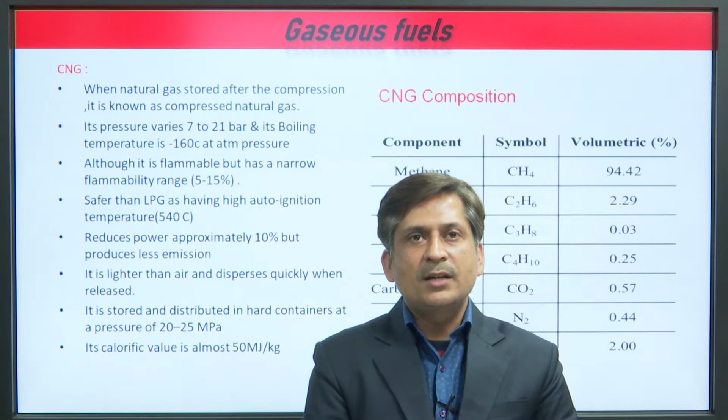In the last lecture we discussed LPG. Now CNG, known as compressed natural gas, abbreviated as CNG, its pressure varies from 7 to 21 bar, boiling temperature is very low at -160. The flammable range is 5 to 15%. It is safer than LPG as it has a high auto ignition temperature of 540 degree Celsius.

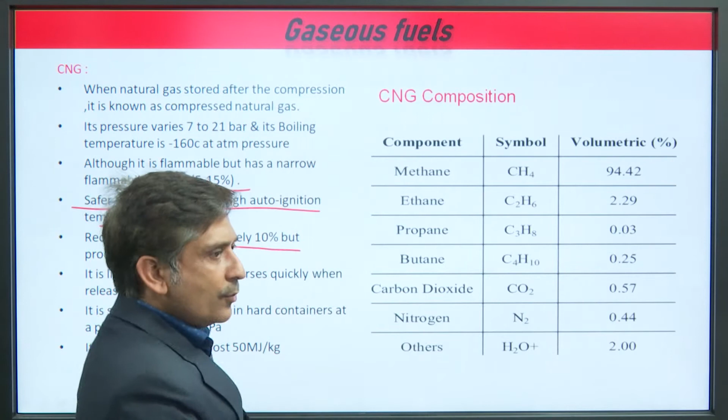But it reduces power if used as a replacement for the engine, about 10% power loss. It is lighter than air and disperses more quickly, which makes it safer for utilization. It is stored at 20 to 25 megapascal and has a calorific value of 50 megajoule per kg.

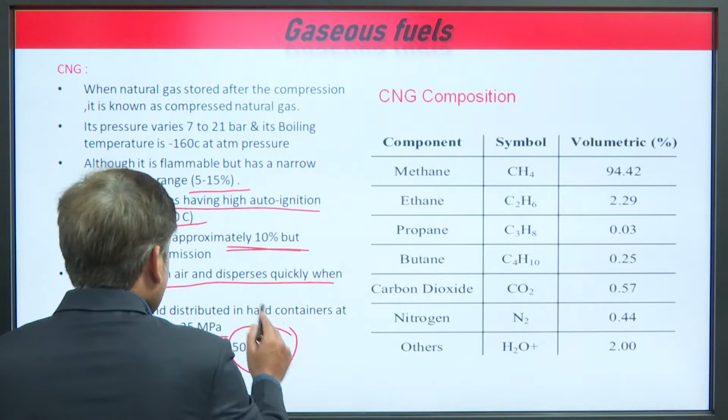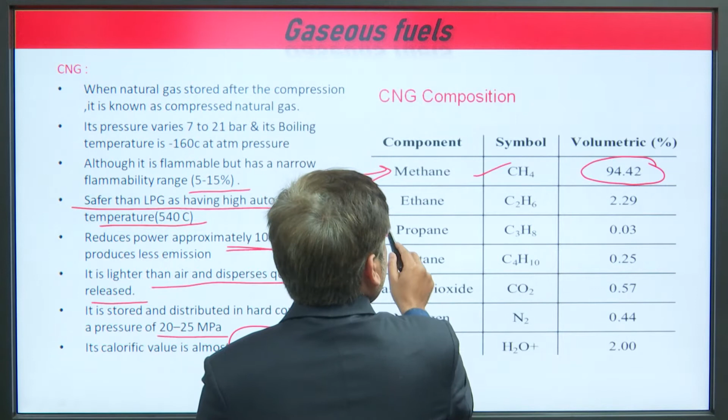This is the composition having the maximum amount of methane, about 95%, and the remaining is ethane, propane, butane, carbon dioxide, nitrogen and others, but the main composition is methane.

Now come to another gaseous fuel, hydrogen, the simplest and most abundant element on earth. It has very high energy and burns with almost no pollution, because if H2 burns with air it gives H2O. But since air contains nitrogen, it also produces NOx emissions.

This problem is there, along with its high cost, storage cost, and safety issues. The lower calorific value of hydrogen is about 120, and it can be stored physically as gas or liquid. It has electrochemical properties used in fuel cells, and a high auto ignition temperature just like CNG. Most importantly, responsible for its safety, it has a broad flammability range from 4 to 74%.

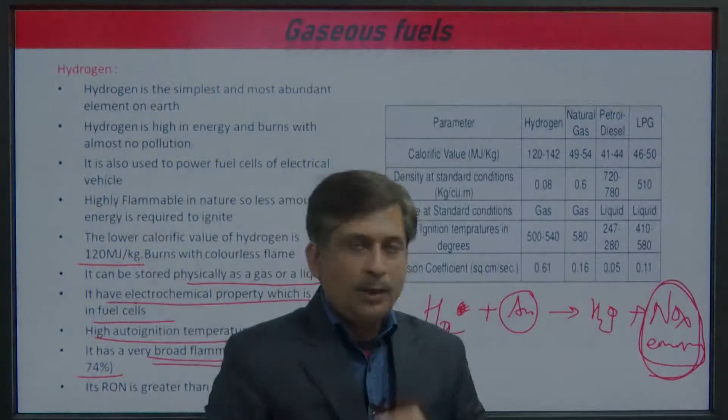So it is very wide. If it leaks somewhere in a given space and there is a heating source, you cannot feel it, and it can catch fire. Its research octane number is about more than 130.

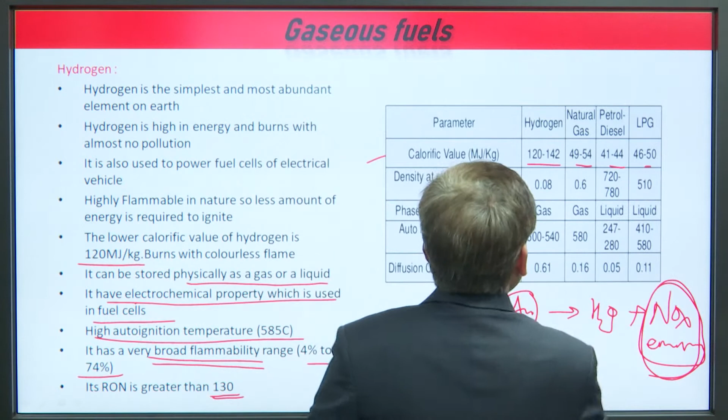These are the comparable properties of hydrogen, its calorific value as compared to CNG, petrol, and diesel. Its density is very low compared to petrol and LPG, and its phase standard is gas. Auto ignition temperature for petrol is between 250 to 280, and for LPG it is very high, but here it is 500 to 540, and it diffuses very fast.

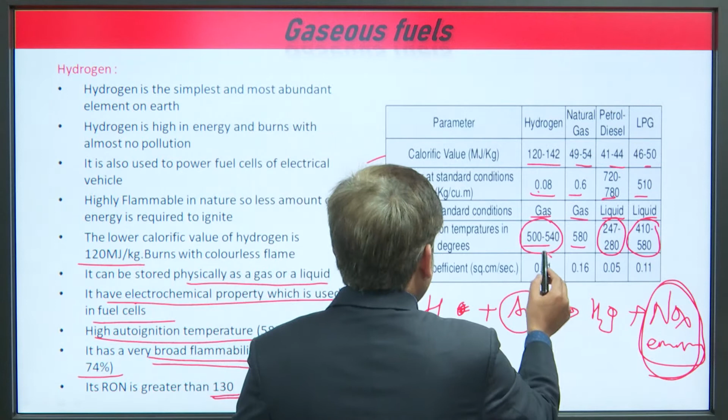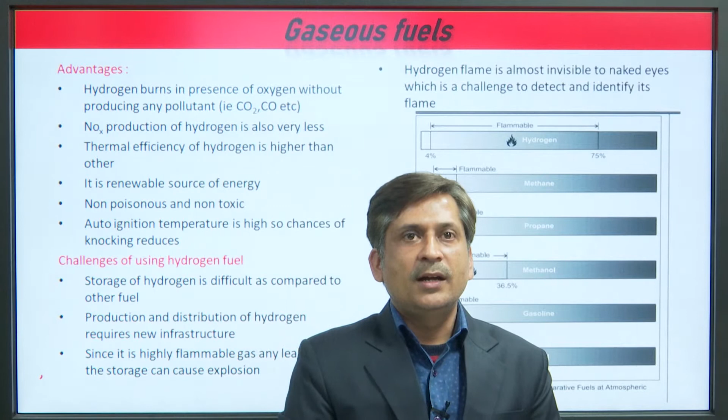Diffusion coefficient, meaning it leaks very fast, and its high flammability range are responsible for its safety concerns, because it can catch fire easily, it is not so easy to handle. These are the advantages of hydrogen: non-poisonous and non-toxic. We have also discussed the challenges of using it.

These are hydrogen's comparative flammability ranges with other fuels. You can see hydrogen is the highest at 4 to 75%. Then for methane, which is the main component of CNG, it is 5.3 to 15%.

Propane has a flammability range of approximately 2 to 10%, and methanol, which is a good SI engine fuel, has this flammability range too. Gasoline, or petrol, has a flammability range from 1 to 7.6%. Diesel has the least among these, 0.6 to 5.5%.

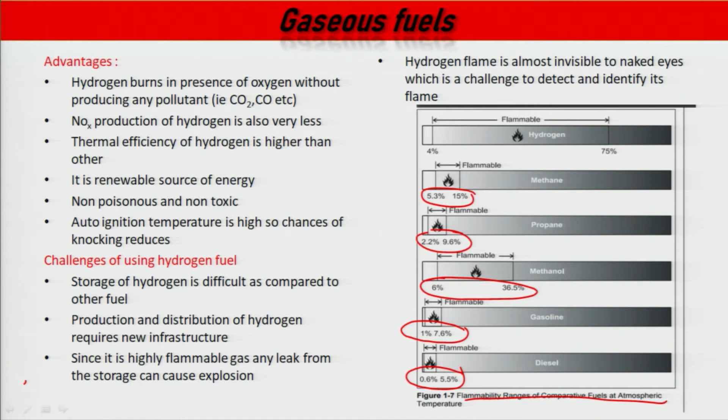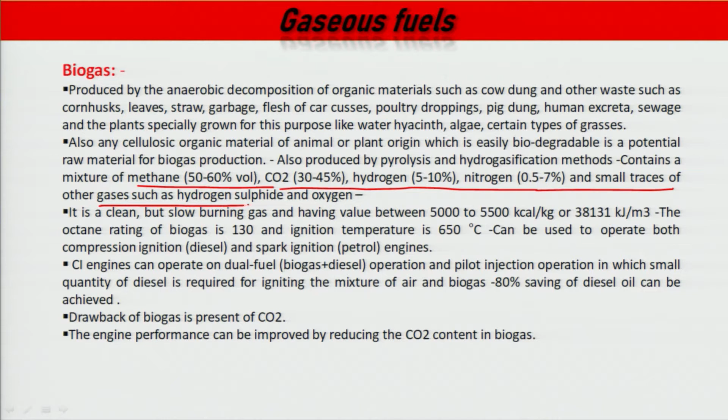Then biogas, which is also called bio CNG type thing, has methane composition of 50 to 60%, CO2, hydrogen, nitrogen, and small traces of other gases. It is a clean and slow burning gas with a calorific value around 5000 kilocalorie.

The octane rating of biogas is close to CNG because it also contains methane. We can also go for enriched biogas, where we purify this biogas and enrich the methane composition, then it is known as bio CNG.

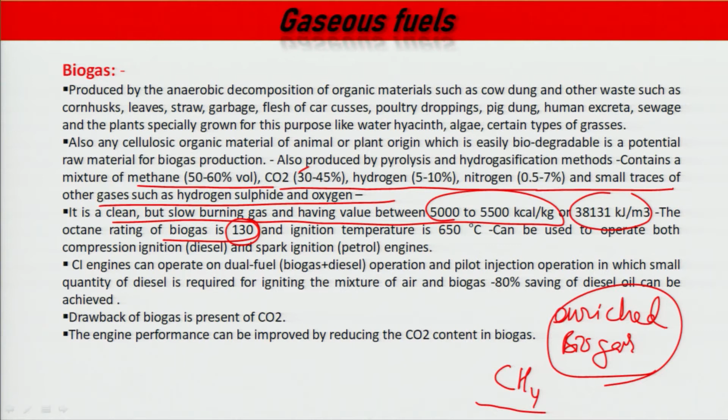The drawback of biogas is the presence of carbon dioxide. The engine performance can be improved by reducing this carbon dioxide percentage in the biogas.

Now come to alternative fuels for diesel and SI engines. Biodiesel is one of them, which we introduced in the last lecture. Biodiesel can be used in some percentage; it is methyl or ethyl ester of fatty acids produced from vegetable sources, edible or non-edible types.

It has better lubricating properties, much higher cetane rating, and very low or near zero sulfur as compared to diesel. So it can be used in experimental work.

We have done many things. Biodiesel is used from up to 20%, which is recommended, but we can also go beyond it. Up to 20%, it has been reported that it gives better air-fuel mixture if blended into diesel. It has lower calorific value. Cold flow property is a big problem because at lower temperature, the components in the biodiesel freeze. So cold flow property is a big challenge.

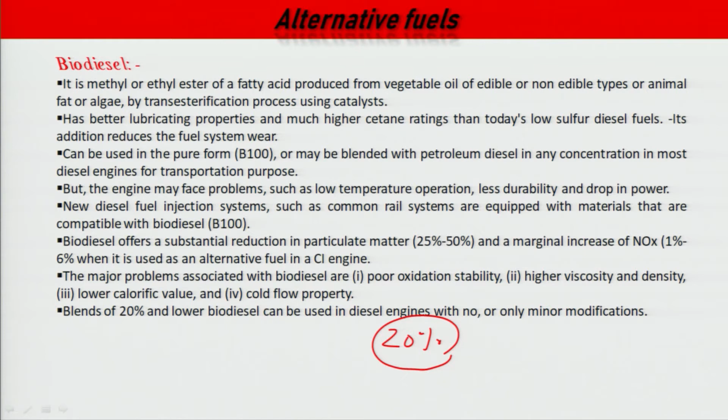So we can go for different methods. In the coming slide we will discuss, because these are the properties, advantages and disadvantages of the CI engine.

The advantages of the CI engine compared to the SI engine are lower CO, lower hydrocarbon, and lower carbon dioxide emissions. But the disadvantage of the diesel engine is higher NOx and a high level of smoke and particulate matter, PM. These are suspended particles, which may be PM10 or PM2.5 based on the size of the particle in microns.

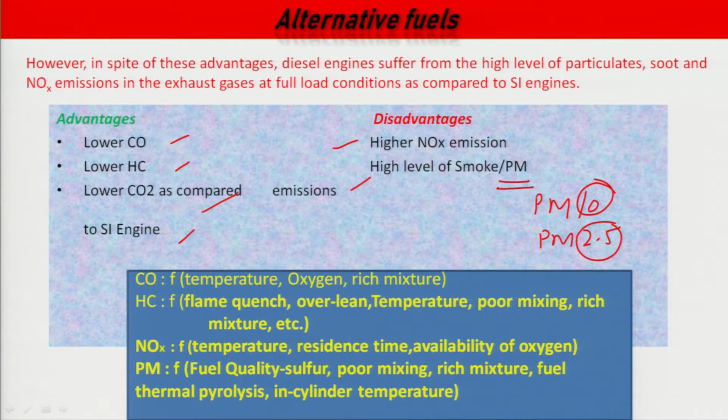So biodiesel can be a good solvent for the diesel fuel in the diesel engine.

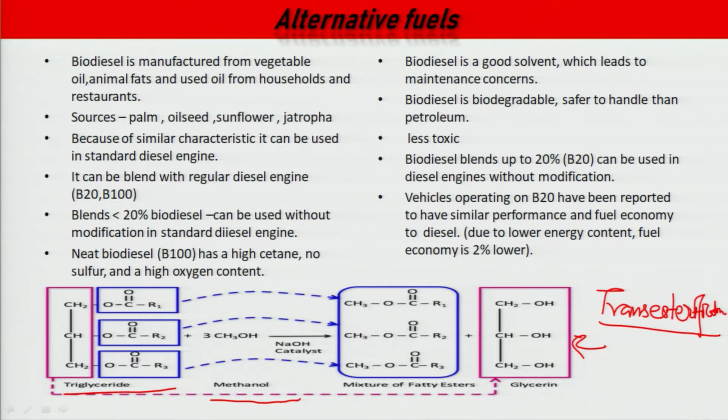This is some study I am showing because we can use different types of seeds, either non-edible or edible. We will not go into detail, just like mahua, sahjan, jatropha, karanja, semal, kachnar, palas, jungle jalebi, etc. If you take 100 grams of mahua, the recovered oil known as SVO gives 48% yield, having 4.4% free fatty acids. These are properties like cloud point and freezing point, showing information about different types of non-edible oils.

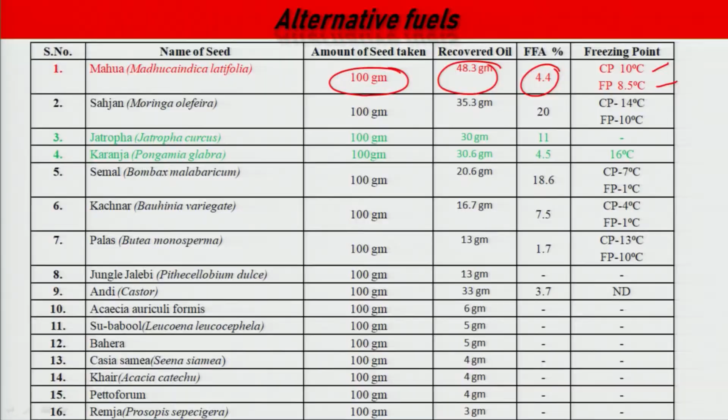To overcome the limitations of using biodiesel, many researchers suggested using different types of biodiesel blends in varying proportions and compositions. You can go for preheated biodiesel, heating it before injection into the combustion chamber using exhaust gas heat treatment process.

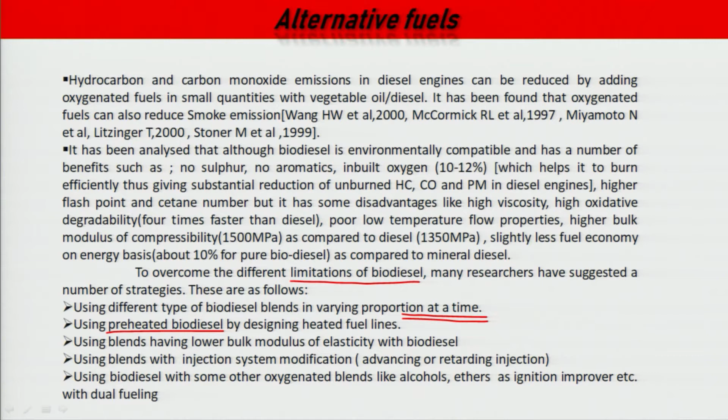Blends having low bulk modulus of elasticity with biodiesel are responsible for the spray pattern of biodiesel injection into the combustion chamber. Using blends with injection system modification, we can go for advancement or retarding of the injection. So some modification, either in the engine or in fuel utilization, allows using biodiesel in higher percentages.

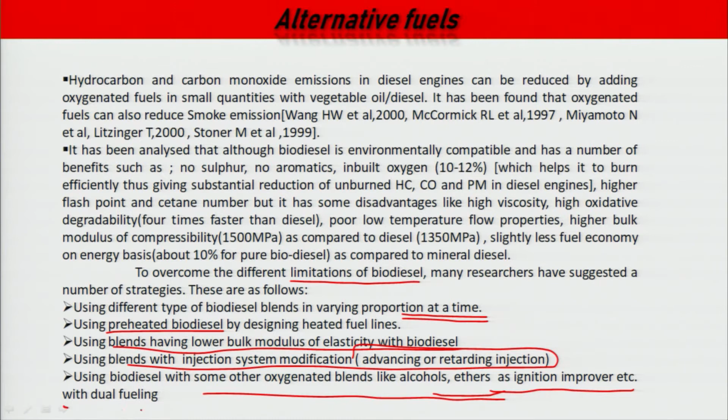Using biodiesel with other oxygenated blends is also reported, like using biodiesel with alcohols and ethers, which improves its ignition properties, and also with dual fueling.

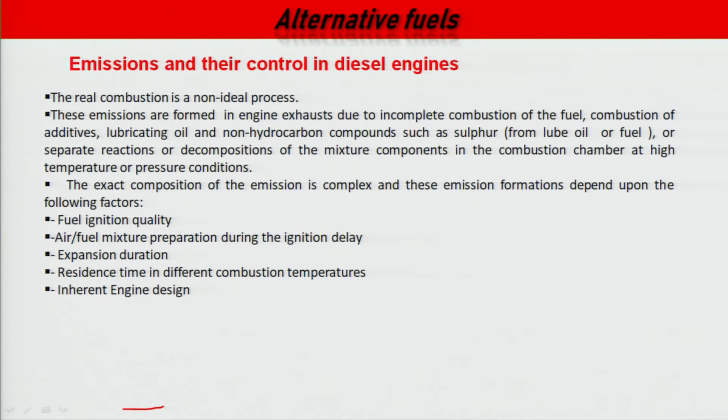For controlling emissions in the diesel engine, we can go for blending of biodiesel, which improves fuel ignition quality because it has a higher cetane number. And we go for these suggested strategies.

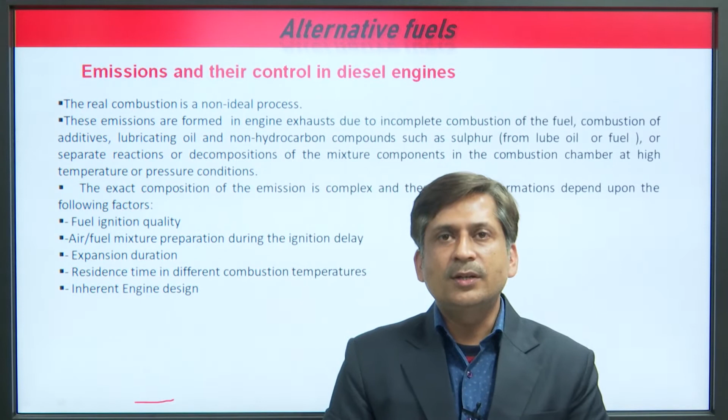For utilization of biodiesel into the diesel engine.

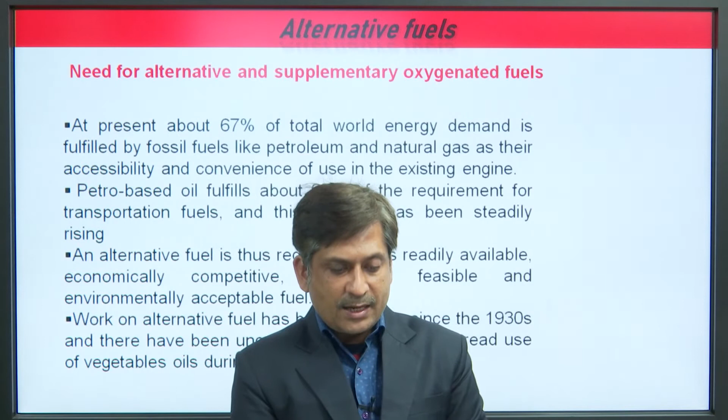So the need for alternative and supplementary oxygenated fuels - why we need this alternative: at present about 67% of total world energy demand is fulfilled by fossil fuels like petroleum and natural gas, due to their accessibility and convenience of use in existing engines. Petro-based oil fulfills about 95% of demand for transportation, domestic use, etc. So alternative fuel is required as it is readily available, economically competitive, technically feasible, and environmentally acceptable, since its utilization helps control emissions to meet stringent emission norms.

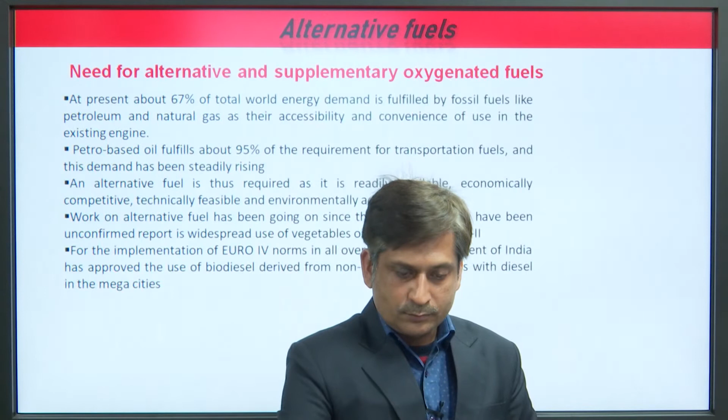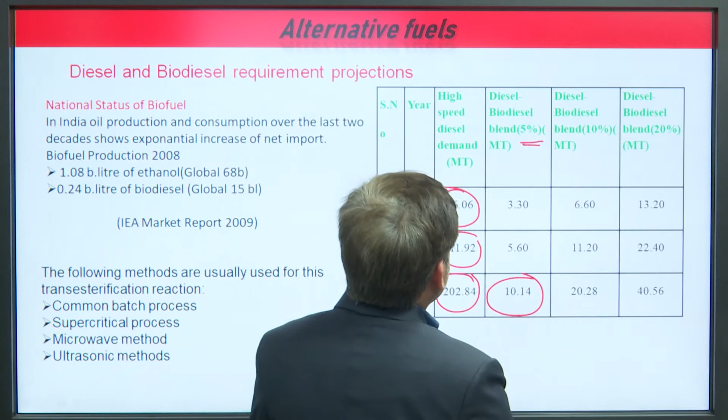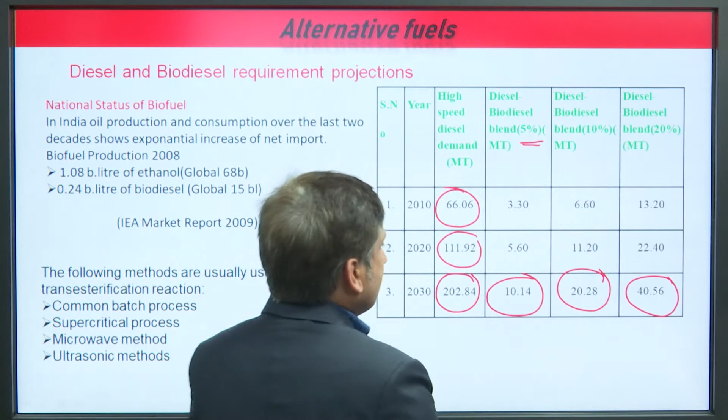So by 2030, if you go for a 5% blend, we need this much amount of biodiesel; if you go for 10%, we will need this much amount; and if you go for 20%, this much amount will be needed for mixing into the diesel.

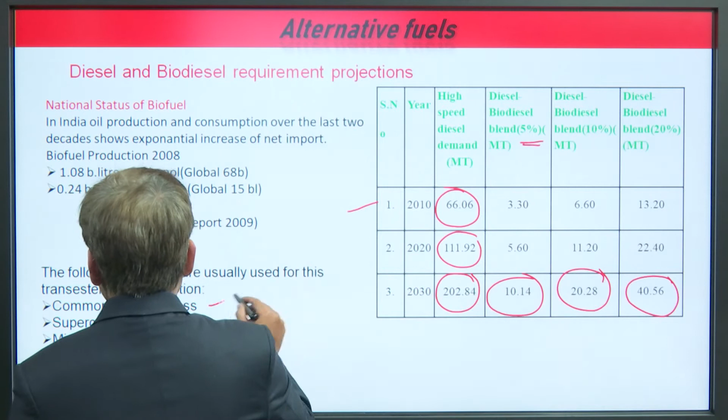So these are some processes with the help of which biodiesel is formed: common batch process, supercritical process, microwave method, and ultrasonic method.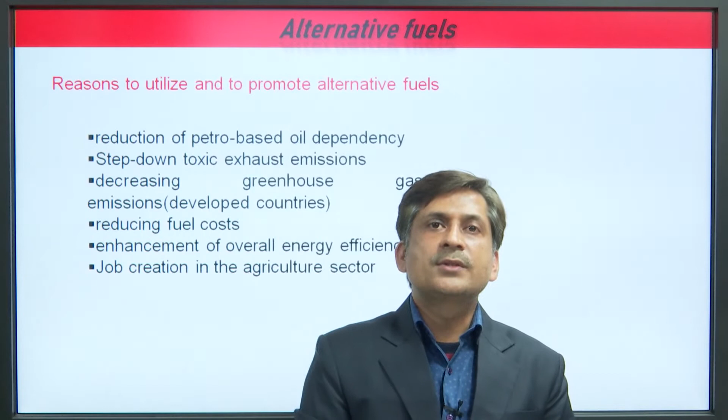And these are the reasons to utilize and promote alternative fuels. Why do we go for alternative fuels? It explains reducing petro-based oil dependency, stepping down toxic exhaust emissions, decreasing greenhouse gas emissions in developed countries, reducing fuel cost, enhancing overall energy efficiency, and also job creation in the agriculture sector. That is why the use of alternative fuels is promoted from the government side also.

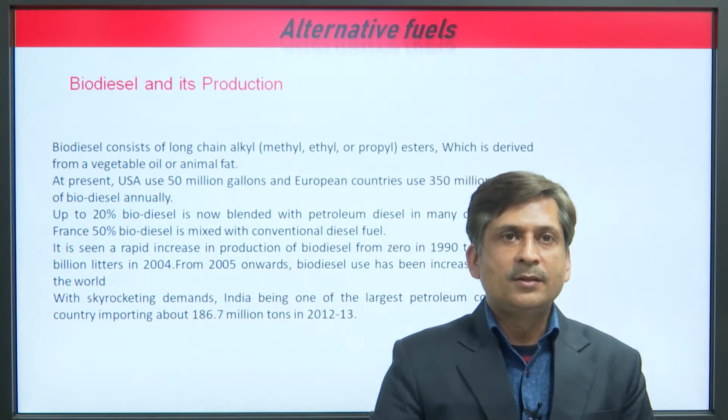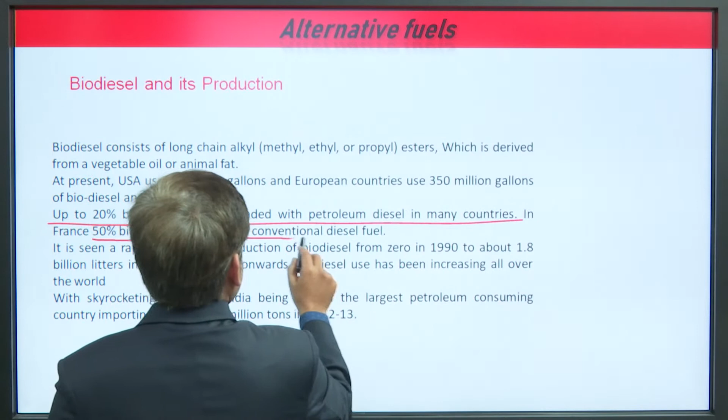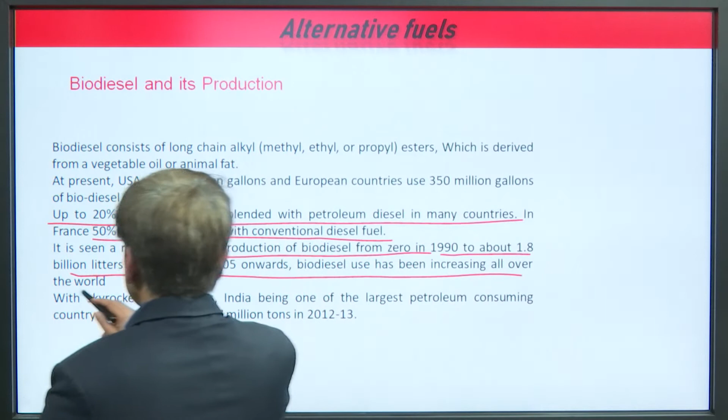These are the biodiesel and its production. What is biodiesel? It is long chain alkyl, methyl, ethyl or propyl esters, derived from vegetable oil or animal fat, and up to 20% biodiesel is now blended with petroleum diesel in many countries, and in France 50% biodiesel is mixed with conventional diesel fuel. So, the rapid increase in production of biodiesel from 0 in 1990 to about 1.8 billion liters in 2004. From 2005 onward, biodiesel has been increasing all over the world, so it is a very big challenge.

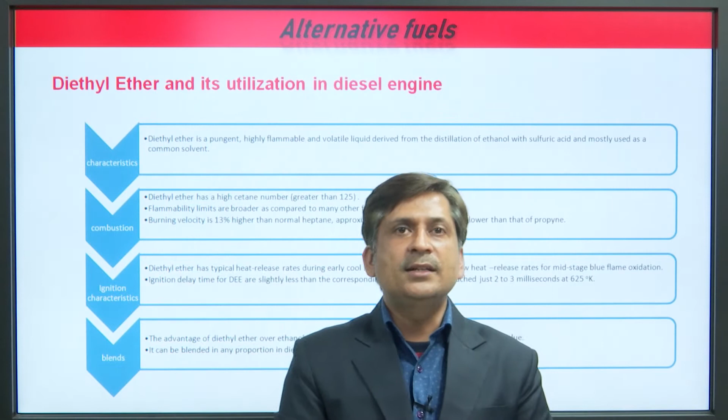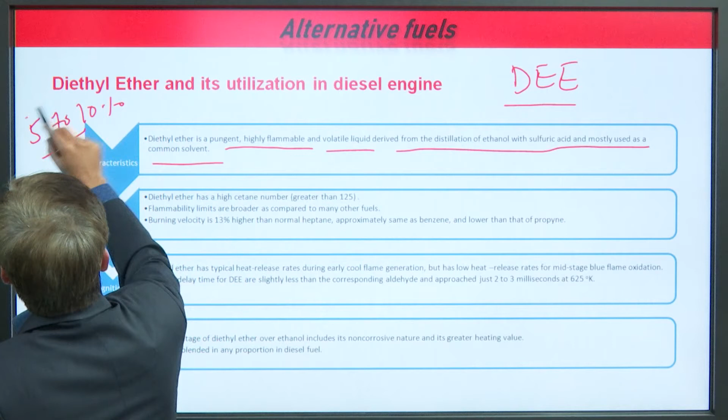Now we can go for another oxygenated fuel, diethyl ether, and its utilization in diesel engine. Diethyl ether, DEE in short, has a very high cetane number. It is a pungent, highly flammable and volatile liquid derived from the distillation of ethanol with sulfuric acid, mostly used as a common solvent. Just like ethanol in SI engine, we can go for diethyl ether blending into the diesel engine, approximately 5 to 10% you can directly blend into diesel. Diethyl ether has a high cetane number of 125, which is needed for good characteristics.

Flammability limits are broader compared to many other fuels, because diesel has a very narrow flammability range, 0.6 to somewhere around 2.2, as seen in the last lecture. With diethyl ether this is increased, so burning velocity of the fuel is increased. Diethyl ether typically has a high heat release rate during early cool flame generation, but a low heat release rate for mid blue flame oxidation. By doing this you can control the NOx emissions, because the mid range is responsible for NOx emissions, so emissions are somewhat suppressed.

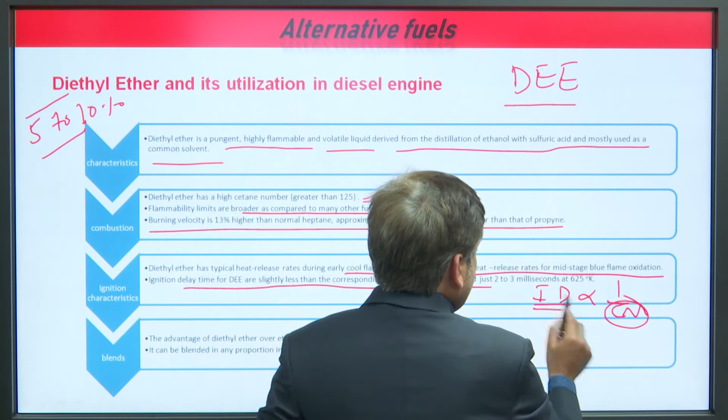Ignition delay time for diethyl ether is slightly less, because ignition delay is inversely proportional to cetane number. If you blend 5% or 10% DEE into the diesel, the cetane number is increased because it has very high cetane number. An increase in cetane number reduces the ignition delay, and reduction in ignition delay means less fuel is accumulated and it combusts in a smooth way, so engine life is also improved.

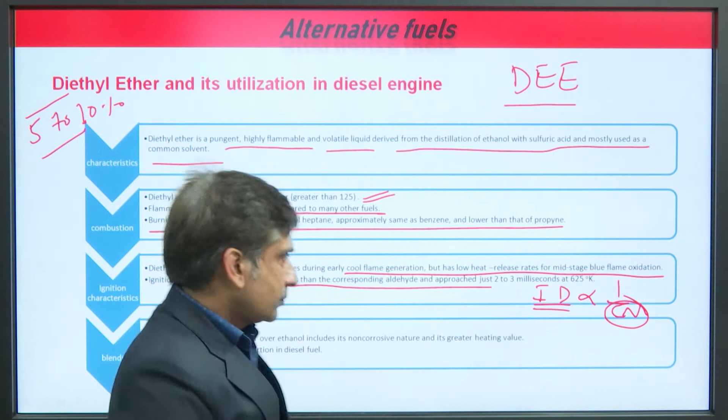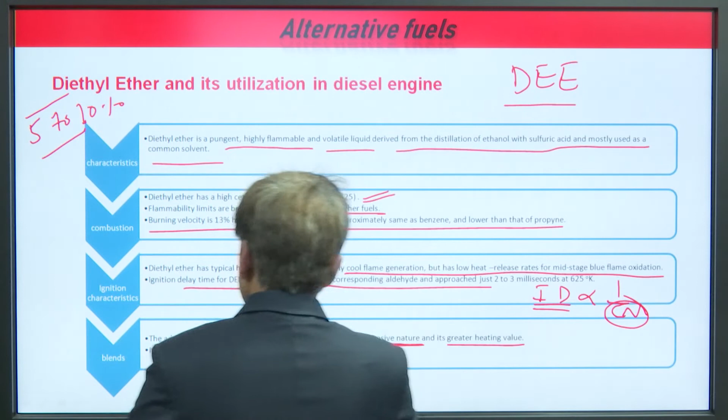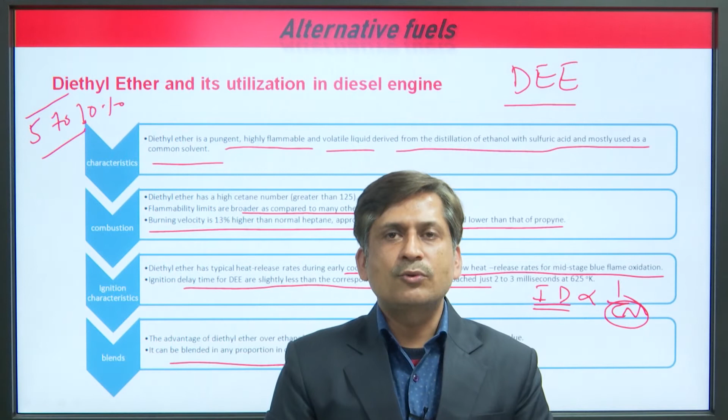The advantage of diethyl ether over ethanol includes its non-corrosive nature, which is a very important characteristic. It has a greater heating value and can be blended in any proportion in diesel fuel, but it is experimentally found that if you add beyond 10, 15 or 20%, some problems are observed, though 5 to 10% you can go for it.

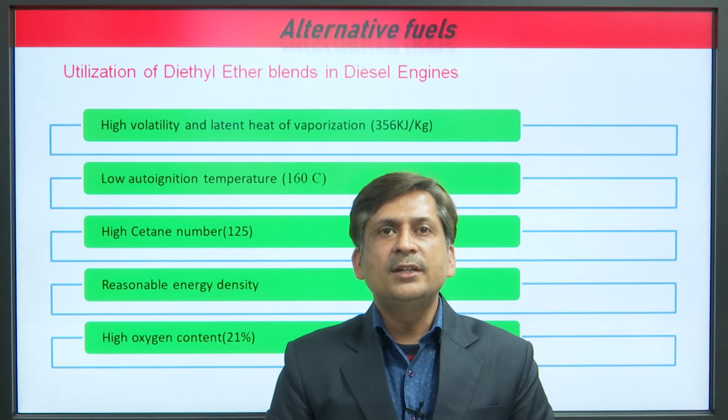These are the characteristics of diethyl ether: high volatility and latent heat of vaporization, low auto ignition temperature. Diesel has an autoignition temperature of more than 250-260 degrees Celsius, while diethyl ether is 160 degrees Celsius. It has a high cetane number of 125, reasonable energy density, and high oxygen content, since it has fuel-borne oxygen. If there is more oxygen available for combustion, smoke is cut down when you go for DEE blending in diesel.

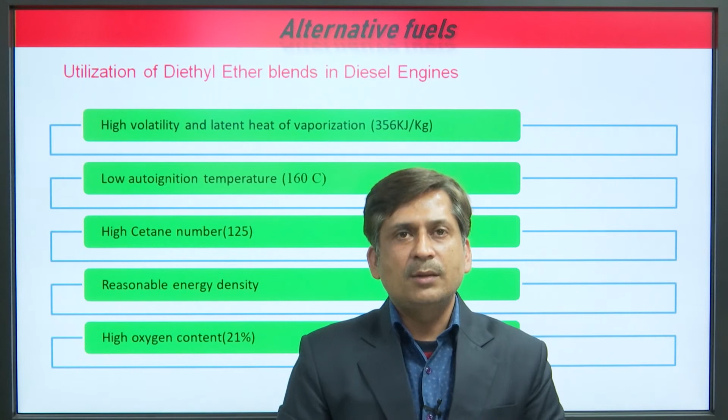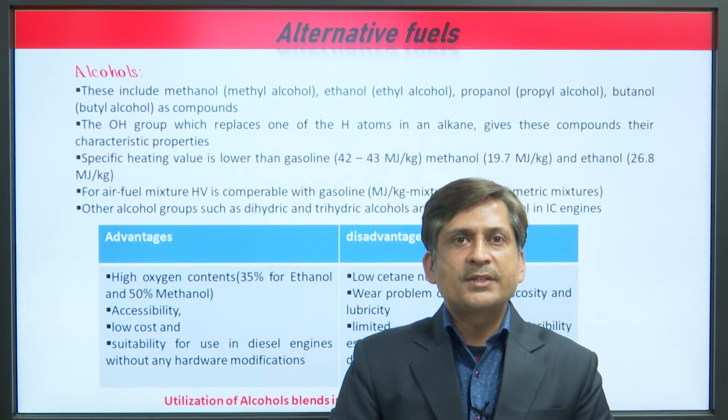Then alcohols, these include methanol, ethanol, propanol, butanol. The OH group, which replaces one of the H atoms in an alkane, gives these compounds their characteristic properties. Methanol, ethanol and propanol all have an OH group, but the molecular weight increases, so they all have different properties. Specific heating value is lower than gasoline, 42 to 43 megajoules per kg for gasoline; methanol has approximately 20, ethanol has 27. For the air fuel mixture, heating value is comparable with gasoline mixture. Other alcohol groups such as dihydric and trihydric alcohols are not used as fuel in IC engines, which is a limitation on utilization of alcohol.

These are the advantages of alcohols: high oxygen content, 35% for ethanol and 50% for methanol. Then its accessibility, low cost, and suitability for use in diesel engines without any hardware modifications.

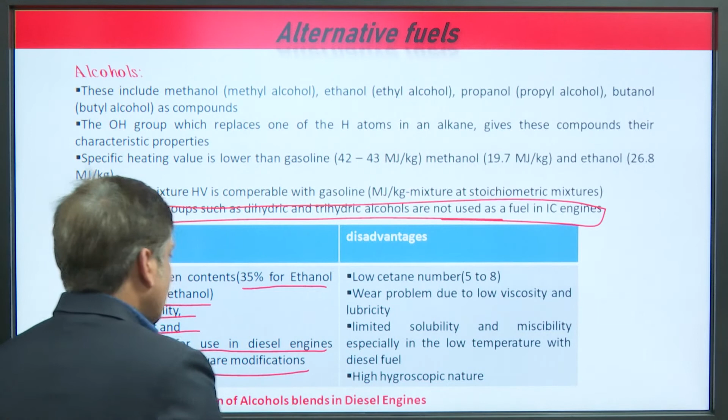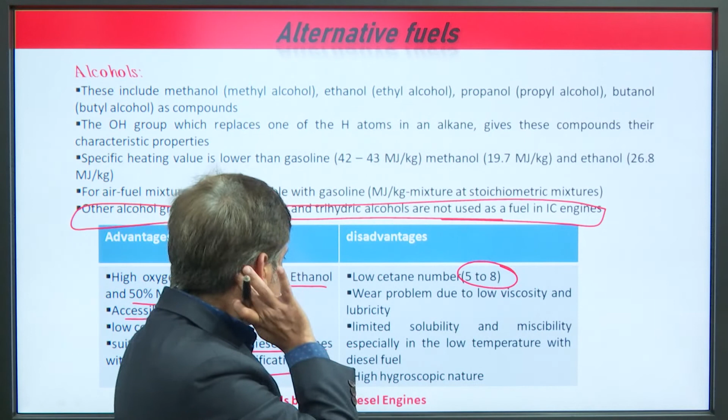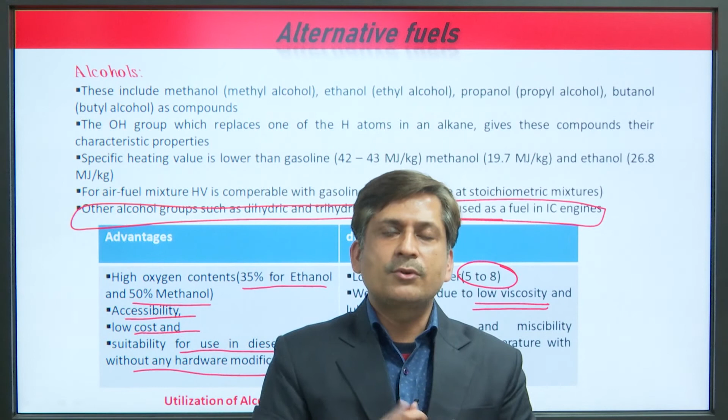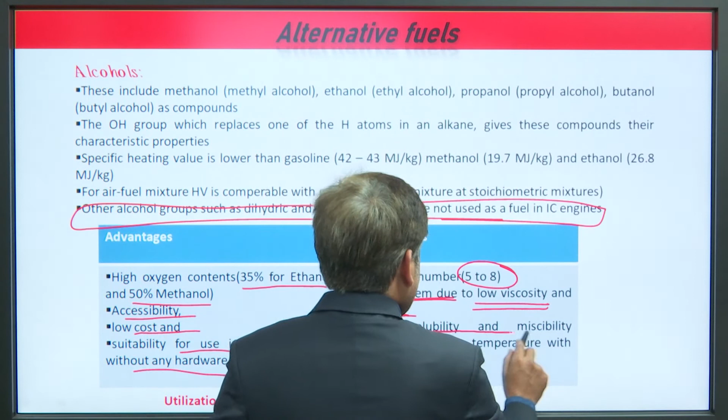Then the disadvantages: if you use blending of ethanol or methanol into the diesel engine, its cetane number is very less, 5 to 8, which is an undesirable quality of the fuel. Another problem is its low viscosity, because if used in diesel blends it will reduce viscosity, and since fuel is injected through the injection pump and injectors into the combustion chambers, if viscosity is reduced there will be wear problems, because lubricity is affected by viscosity. Also there is limited solubility and miscibility, especially at low temperature with diesel fuel, and it is hygroscopic in nature, meaning it absorbs water.

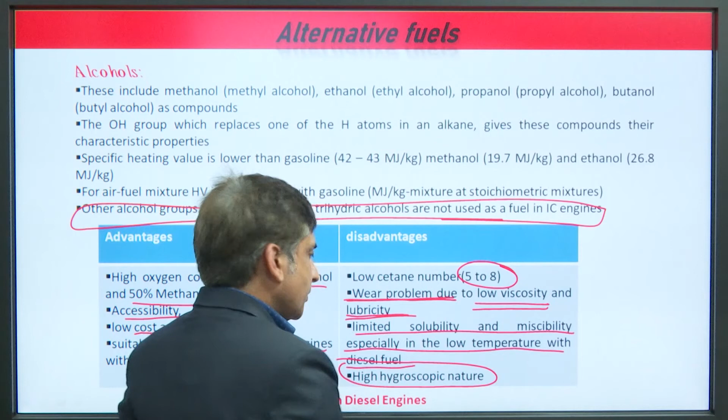So, sorry. So, methanol, sorry.

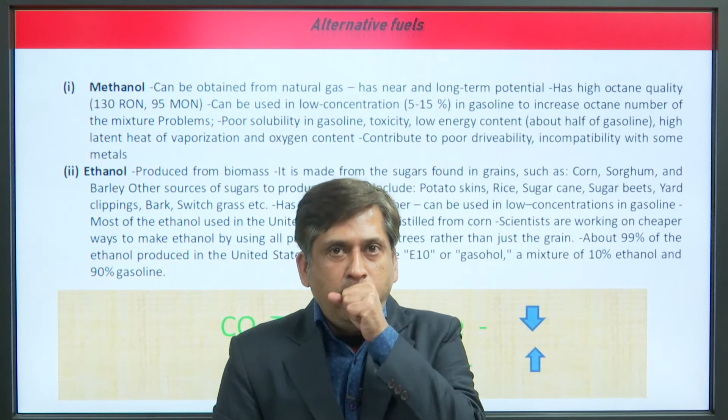If we talk about methanol, it can be obtained from natural gas and has near and long term potential. It has high octane quality, 130 research octane number, and motor octane number of 95. It can be used in low concentration, 5 to 15% in gasoline, to increase the octane number of the mixture.

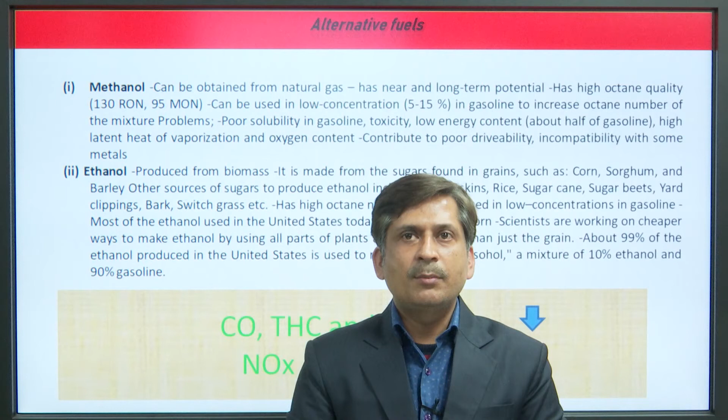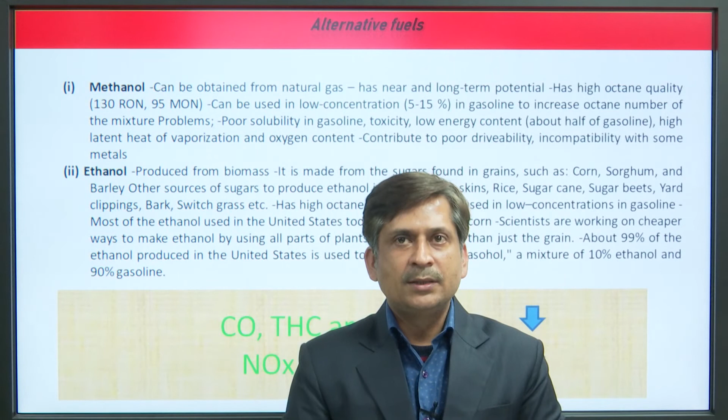However, it has poor solubility in gasoline, toxicity, low energy content about half of gasoline, high latent heat of vaporization, and oxygen content contributing to poor drivability, as well as incompatibility with some metals.

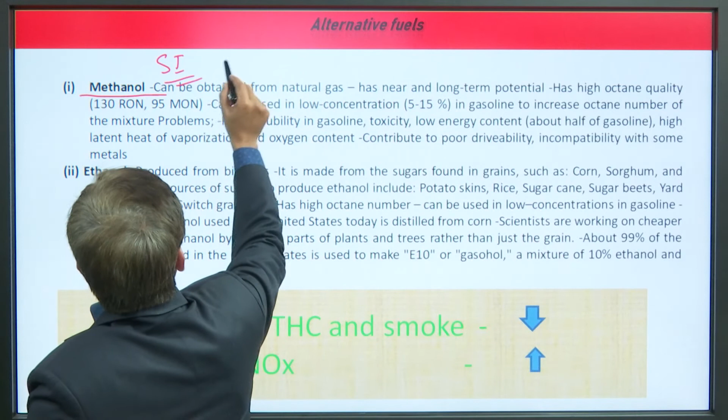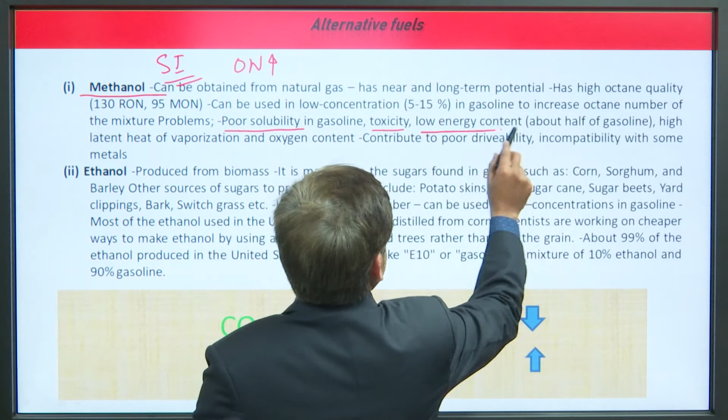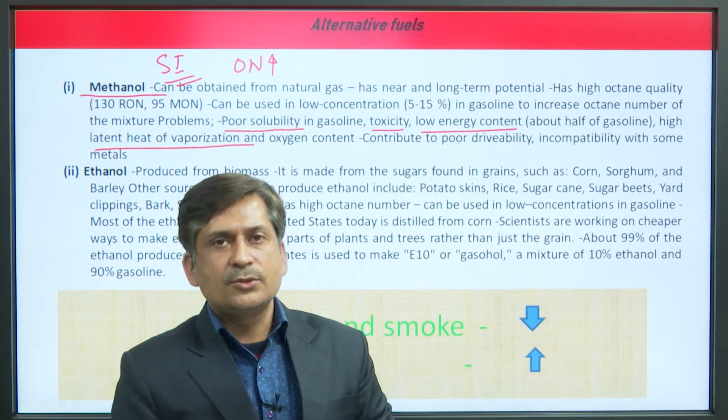So methanol can be used as an SI engine fuel because it has higher octane numbers, but it has problems: very poor solubility, toxicity, low energy density, and very high latent heat of vaporization, which is not desirable for the SI engine. It should be comparable with petrol, not higher, and it chemically reacts with different engine components. All this fixes the percentage of its blending.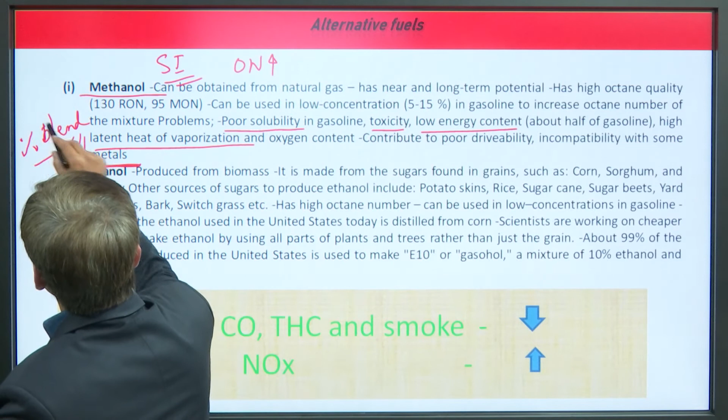Now come to ethanol. Ethanol is produced from biomass; it is made from sugar industries, sugar found in grains such as corn and sorghum, barley, and other sources of sugar to provide ethanol. You can produce it by chemical fermentation processes using sugar cane, sugar beets, etc.

It has very high octane number and can be used in low concentrations in gasoline. Most of the ethanol used in the United States today is distilled from corn. Scientists are working on cheaper ways to make ethanol by using all parts of plants and trees, not just grains.

About 99% of the ethanol produced in the United States is used to make E10, a mixture of 10% ethanol and 90% gasoline, known as gasohol. These are the effects on emissions when using 10% ethanol.

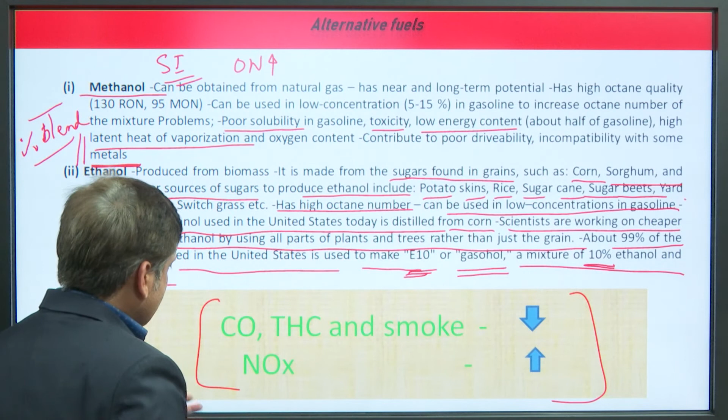Based on some experimental data, I have concluded that carbon monoxide emission, total hydrocarbon emission, and smoke emission are suppressed with the use of ethanol or methanol in diesel engines.

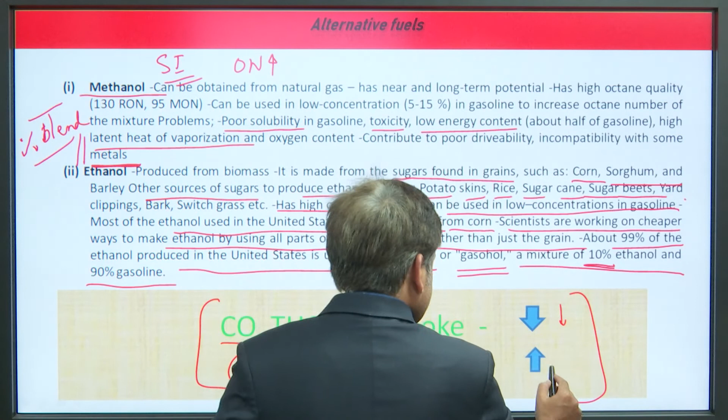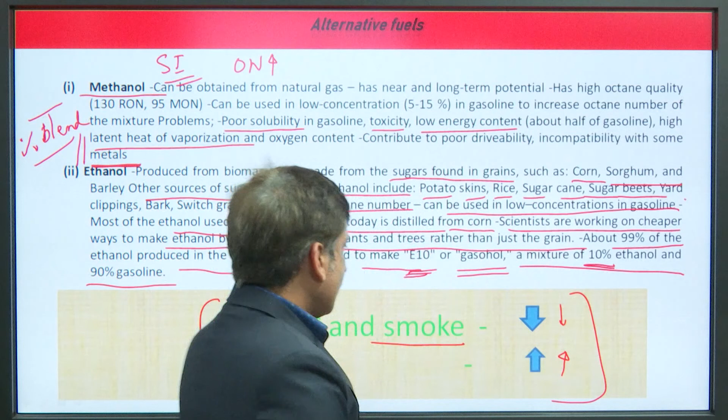This is for a study on diesel engines, and the NOx emission is increased because oxygen concentration is also increased, since ethanol has fuel-bound oxygen. So NOx emission is increased, but CO, total hydrocarbon, and smoke emissions are somewhat reduced.

So, alcohols are unsuitable as diesel fuel for the following reasons. It is best suited for SI engine fuel. So why is it not suited for CI engine fuel?

The Cetane number of alcohol fuels is very low, 0 to 8, which prevents their ignition by compression. Since CI engines require fuel with the characteristic of auto ignition, if the Cetane number is very low, ignition by compression is not possible.

Alcohol fuels also have low lubricity quality, causing trouble in injection pumps and nozzles, since their lubricating characteristics are reduced. A third problem is material issues caused by the harsh reaction of methanol towards various plastics and metals, different components of the engine and other auxiliary components.

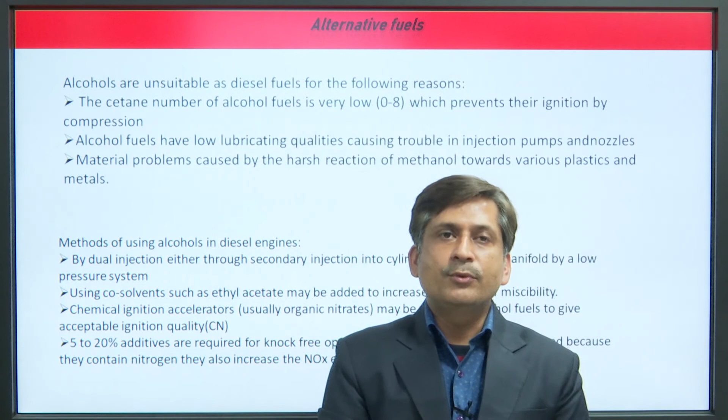So, here are some methods of using alcohols like methanol, ethanol, or butanol in diesel engines.

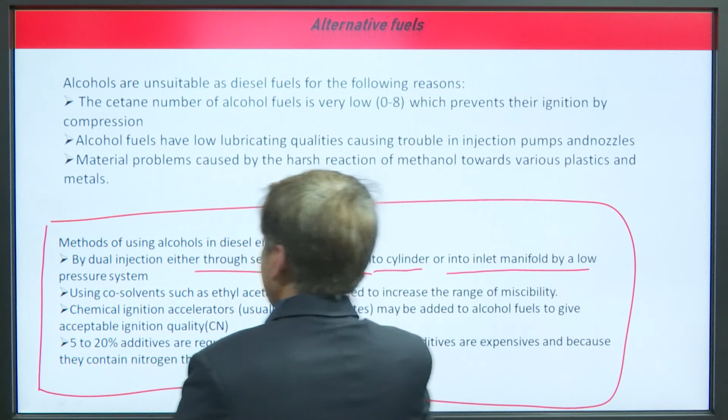The first method is dual injection, either through secondary injection into the cylinder or into the inlet manifold by a low pressure system. This is known as dual injection. For example, if you are supplying fuel to the engine, this is your intake manifold, and this is your diesel injection through the main injector.

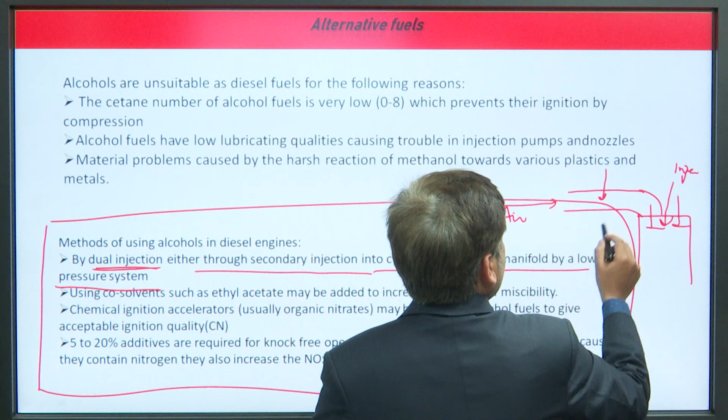Either the air comes here, or you employ injection at this intake manifold, where ethanol is first inducted with the air, contacts it here, and is sucked with the air into the cylinder, while diesel is injected directly into the combustion chamber with an injection device. This is known as dual fuel mode.

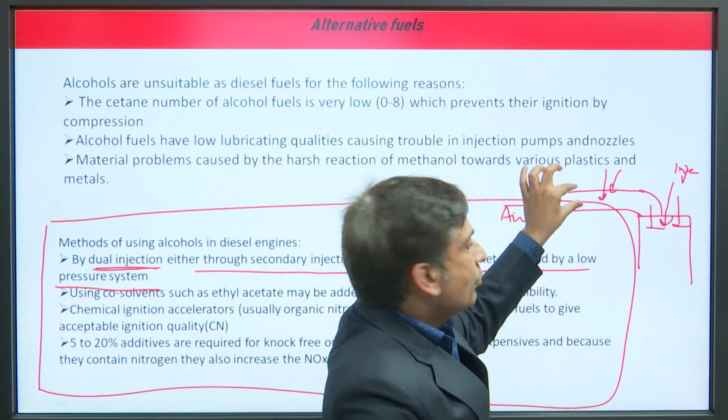Here you are injecting fuel into the intake manifold, so this is dual injection, either through secondary injection into the cylinder, meaning you directly inject the fuel.

Another method is using co-solvents such as ethyl acetate, which increases the range of miscibility. Then there are chemical ignition accelerators like organic nitrates added to alcohol fuels, with 5 to 20% additives required for knock-free operation. However, additives are expensive, and because they contain nitrogen, they also increase NOx emission.